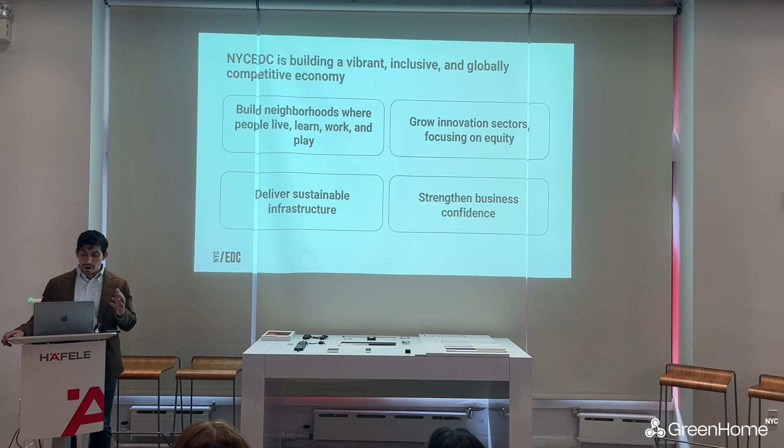We are developing infrastructure, so everything from ports and ferries to big logistics hubs around the city. We develop and run those, and then we have a data analysis arm that's really about strengthening business confidence and reporting on trends in New York City's economy.

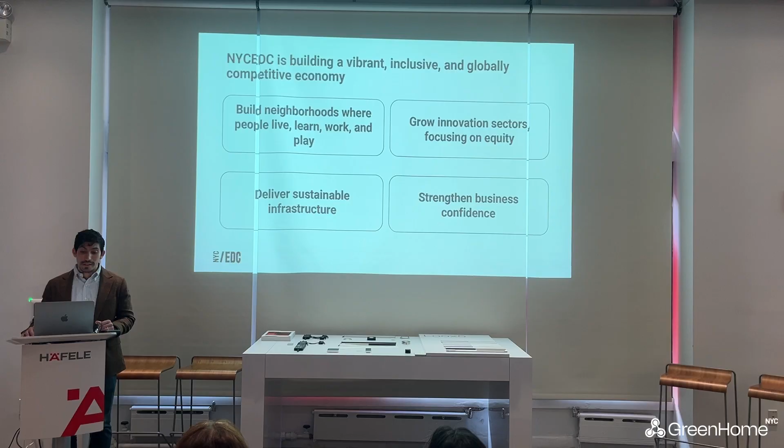Even if you have heard of EDC, or if you know EDC, I think it's hard to wrap your head around how big its reach is. There are over 200 properties around the city that are managed by EDC. It adds up to about 64 million square feet of real estate. We're also building all the time, about 170 capital projects worth about $9 billion that are either under construction or about to be, and then over 400 programs and initiatives that are all about growing jobs and expanding businesses here in New York.

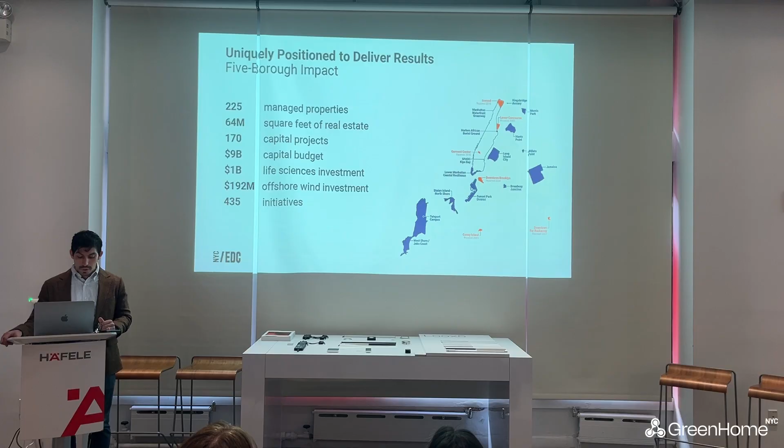And so on the green economy front, early last year, the city EDC put out this report called the Green Economy Action Plan. It has over 60 commitments and investments about growing jobs in the green economy, which is a lot focused on the building sector in New York and on the transportation sector.

There are about 150,000 jobs that are in the green economy today. That's about 3% of jobs in New York City. We expect that to more than double by 2040, and there'll be over 380,000 jobs within the green economy. So all the initiatives that came out of this plan, including an initiative around mass timber, is really what my team works on.

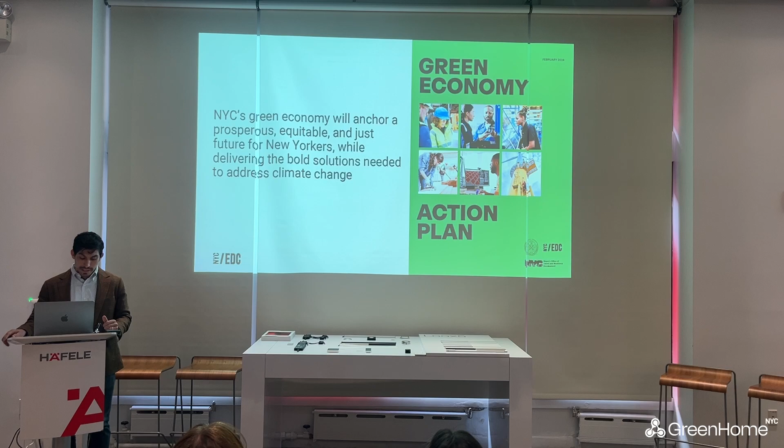People may have heard of EDC in the context of a builder or an asset manager, but really on the programmatic side, where I focus with the green economy, part of what we do is help pilots get off the ground. That could be new climate tech, giving them space to test out and demonstrate their products on our assets. It could be less new tech, like mass timber, which has been around for a while, but really giving space to try out the product in a real environment.

We are also supporting regulatory wayfinding, and by that I mean New York has lots of regulations at the local level. Most of them are about safety, and we will help climate tech companies or climate tech projects navigate the fire department, the buildings department, and make sure that their projects can come to fruition.

And then lastly, like I said, we have a big real estate portfolio, so we are using our procurement power, our capital construction projects, to scale some of the climate technologies that we're most excited about.

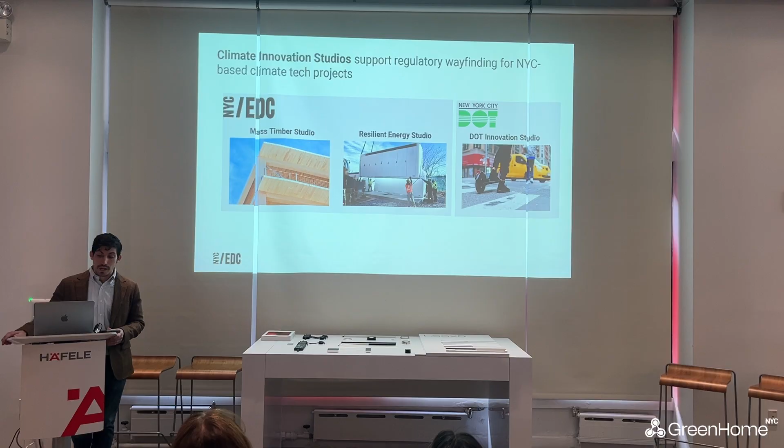So on to how this relates to mass timber. We run a program, or a couple of programs, under the umbrella of the Climate Innovation Studios. Two of them are run directly by EDC and are programs that I manage: the Mass Timber Studio and the Resilient Energy Studio, which is really focused on battery energy storage. And then DOT runs a studio as well, really looking for these new climate tech projects.

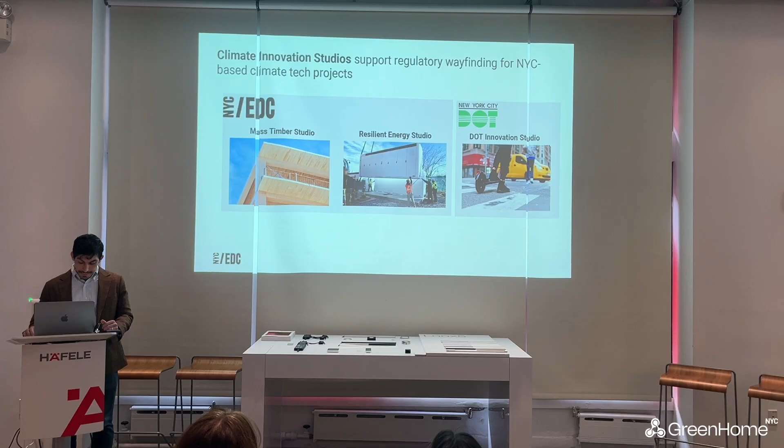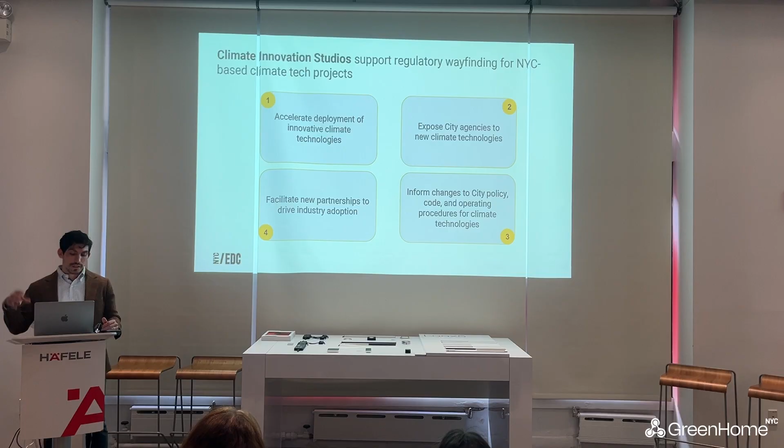The goals of the studios are to really accelerate the deployment of new climate tech, to expose the agencies, mostly the regulatory agencies, to these newer technologies. Broader than that, we're trying to really inform changes to the regulatory environment, making it easier for projects that are deploying climate tech to actually come to fruition in New York, and then try to, as much as we can, facilitate partnerships that are necessary across industry, not just with these projects and the government regulators.

So the Mass Timber Studio really has 4 pieces to it. One will actually identify projects, real mass timber construction projects in New York City, and help them, or pick ones that we think are kind of catalytic. We think that the completion of this project will help mass timber scale up in New York City.

And I guess I should take a step back, but I guess the other speakers will speak more about it. Mass timber is really beneficial because it has a lower embodied carbon than traditional building materials like concrete and steel.

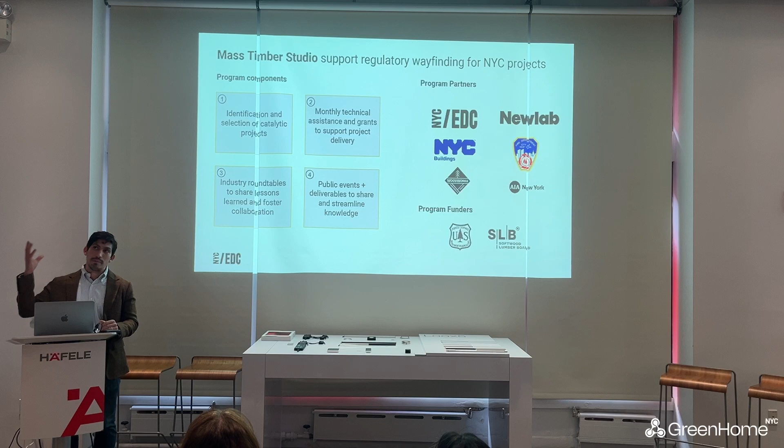Embodied carbon, the way I think about it is: if operational carbon is what it takes to run the building, your HVAC, your lighting, embodied carbon is the carbon that's actually embedded in the building material itself and comes from the construction or the deconstruction of the project.

So mass timber is more sustainable to use, and for architects and contractors who know how to use it, they can actually build their project faster and, if not cheaper, at the same cost as concrete and steel.

So we select projects that we're going to put into the studio. We'll have monthly technical assistance with the projects, and our partner Woodworks, which is a mass timber expert, provides technical assistance to the teams. In addition, we bring in the fire department and the buildings department to meet with these teams monthly, answering questions they have about the building code and helping them as they design their projects.

We have two industry roundtables as part of the studio where we bring together everyone in person, raise the main issues that are impeding mass timber from being deployed in New York, and hopefully collaboratively come up with solutions between government and the project teams. At the end, we'll share lessons learned from this studio, through events and through a report, to make sure it's not just these projects that advance, but the broader industry.

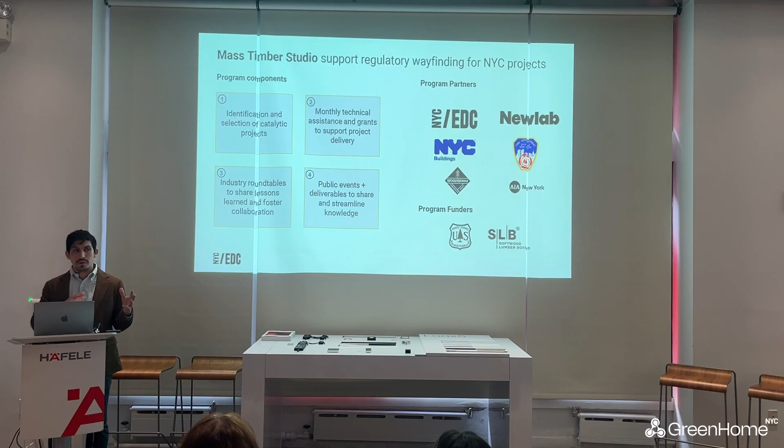Then the second cohort, which we just launched earlier this year, has another seven new projects all around the city, almost hitting every borough. Again, it's a mix of public and private projects—there's residential, some more community buildings, institutional buildings.

Some of these projects you may have heard about. The New York Climate Exchange is the big campus on Governor's Island; they're planning to build one of their buildings with a mass timber structure. A lot of them are located in environmental justice communities, so this is not just a product for high end—we think this could scale across New York City.

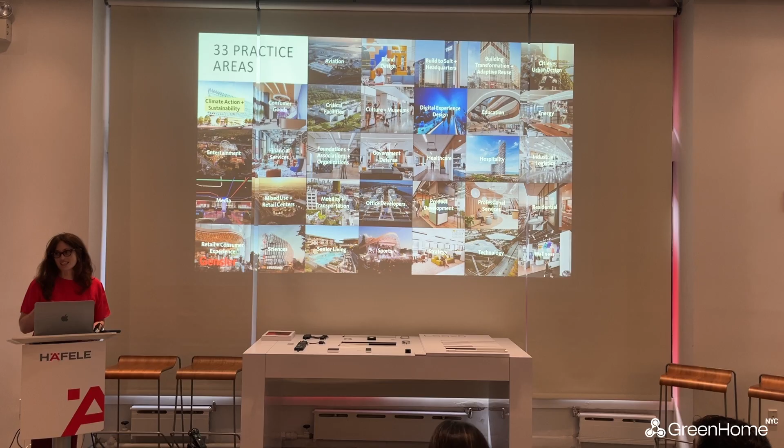So Gensler is massive, and I'm going to jump back to where I was going to start. But I am one of the founding members of our climate action and sustainability studio, which sits within the climate action and sustainability practice area, one of the 33 specialized practice areas that exist within Gensler. As a dedicated sustainability studio, this is very much our mission.

The goal is to turn the goals and commitments of our clients into tangible actions that result in impacts such as the reduction of carbon emissions, improvements in human health and ecosystems, and more circular building practices.

Our studio's work is categorized into 3 main project types. We do your typical certification project, like LEED certification, WELL certification, things of that nature. We also do what we consider strategy projects, things like design guidelines, design standards, sort of regulations for clients of how their spaces are meant to be designed and built. And then we also do a lot of analytics work, which I'll talk about further on in this deck, but those are things like life cycle assessment, daylight analysis, glare analysis, energy modeling.

To give you a little background on myself, I came out of design. Both my undergrad and graduate degrees were focused on interior design, but during and after graduate school, I worked as a researcher at the Parsons Healthy Materials Lab, which is a research and design lab that focuses on educating the industry and the public about potential hazards present in common building materials. They work primarily on low-income housing as their project typology, because this is where you see the highest instances of the worst quality materials, because they are the cheapest.

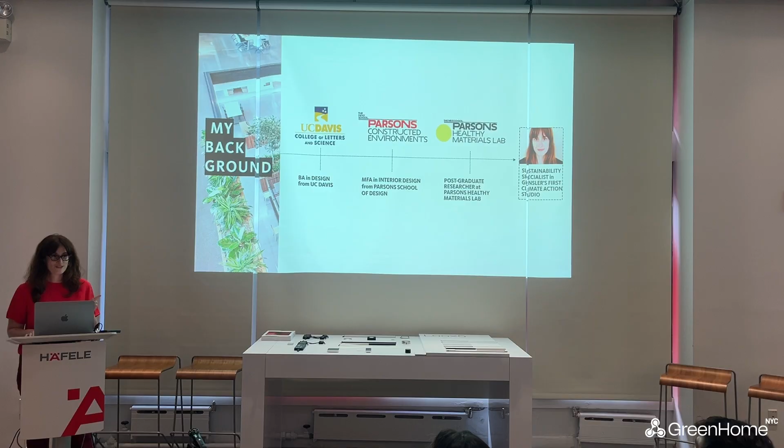I helped develop some of their material collections as well as their first low embodied carbon collection. That work is largely how I came to be at Gensler, and how I came to be involved in the formation of the Climate Action Studio.

Gensler is actively working to shift the built environment towards net zero carbon emissions, both operational and embodied. One of the ways we approach this is through the materials we specify on our projects. Similar to the EDC, we recognize that making better material selections was critical, albeit complex, and that to achieve this goal, we're really uniquely positioned to have impact because of our size.

As I already showed, we have 57 offices. There's 6,000 people working at Gensler across the globe, and 1 billion square feet per year. So by that logic, Gensler is not just the largest architecture firm, we're also probably the largest specifier of building materials on the design and architecture side. This means we have a remarkable ability to influence the production of and demand for sustainable materials.

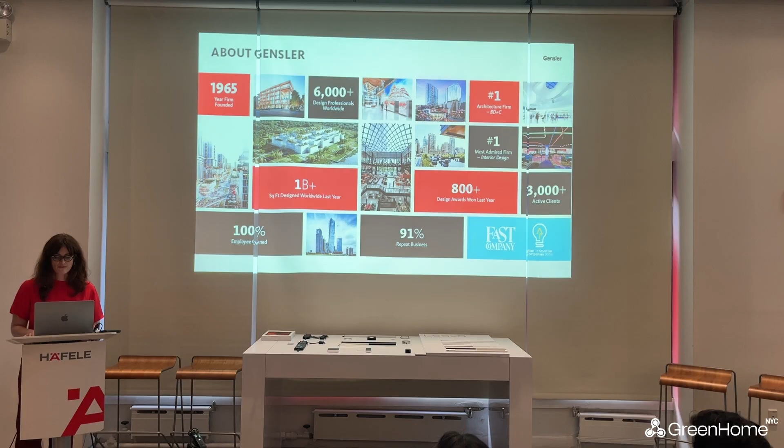I'm going to walk you through a few of the ways we're doing this. The goal is really to drive down emissions associated with the built environment via these sustainable materials and to have an impact. To break down our approach into 3 parts:

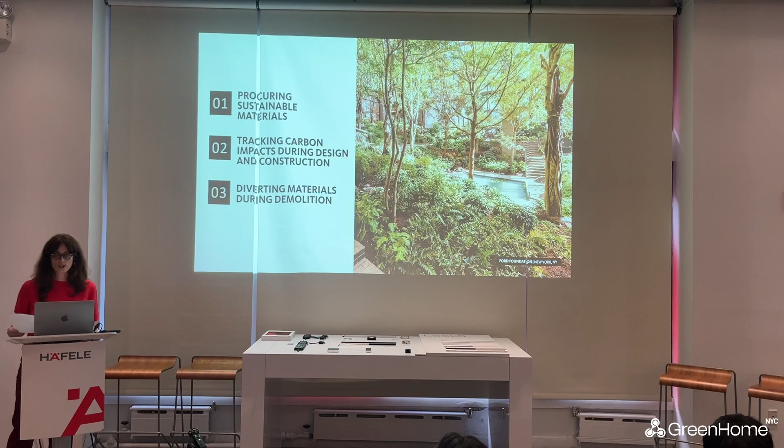The first section, I'll talk about how you get 6,000 people to change how they specify materials and what they specify. Then I will walk you through how we track carbon emissions throughout the design phase and construction, so that we ensure the decisions we put in place are actually happening and those reductions are occurring. And then what we're doing to divert materials from landfill during demolition.

Starting with how do you get a firm of our size to transition to specifying more sustainable materials? The really simple answer is you create a standard for your projects. A standard is just, this is how you do it. And that's exactly what we did.

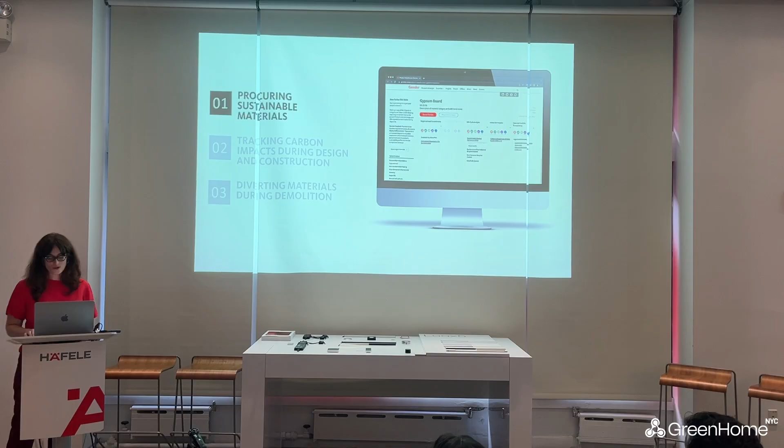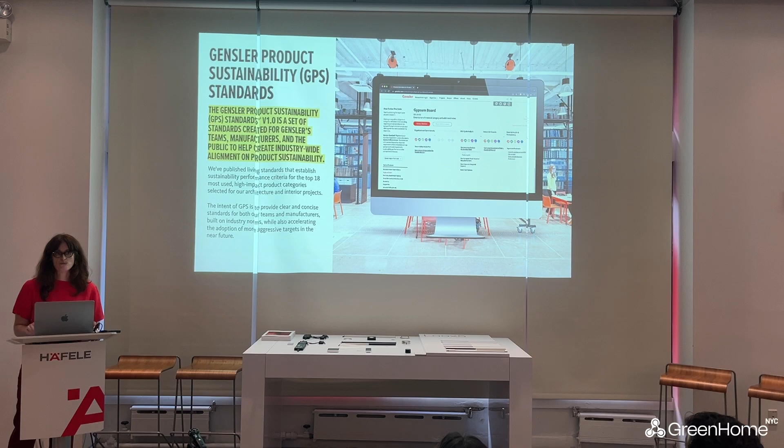The Gensler Product Sustainability Standards, which we typically refer to by its acronym GPS, are a set of product-specific standards that establish both required and market-leading sustainability attributes. Currently, we have requirements for 18 of the highest impact and highest volume products that we specify on our projects. There are also 5 impact areas where the criteria are organized, and 2 levels of performance: a Gensler standard level and a market differentiator level. This standard is being applied to all of our projects across the US, Canada, Europe, and the UK.

So I know that we tend to use a lot of internal jargon that maybe doesn't really translate to something that makes sense. So I feel like this is always just a really helpful breakdown of understanding what it is that we're actually talking about.

So what it is, what it isn't. It's a comprehensive set of sustainability criteria ranging from carbon to human health impacts. So this is not just a set of embodied carbon targets.

We're focused on materials that we, Gensler, specify. We are not focusing on structural materials, so I'm not going to touch on mass timber, but that's largely because we're not structural engineers. So we tend to not be the people on a project who are determining the concrete, the structural steel, not even the facade. Really, we're touching different materials than that.

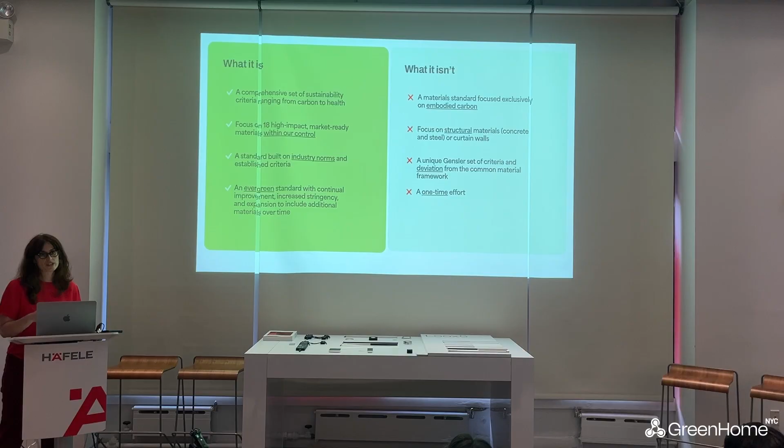So this is a standard that is built on industry norms. This is not a unique set of requirements that Gensler is applying to our projects. This is really built off of the established precedent of programs like LEED or WELL, the work that the USGBC and ILFI have been doing to really drive sustainable material procurement in this space.

And then finally, this is an evergreen standard. So the object of the exercise is not to set a one-time standard and then just hold all of our projects to that. We are going to implement this standard on our projects, and as the market changes, we will shift the criteria to reflect what is actually market leading in a year or two from now.

So, okay, I thought it might be helpful to look at it quickly, but so this is a Gensler standard set of requirements for a specific product. You've got the name of the product, you've got its specification division, and then you've also got very clearly laid out what types of materials it doesn't apply to.

So that really helps expedite the process of like, does this product need to meet sustainability requirements, yes or no? And then when you're at the standard level, the expectation is that a product meets all of these requirements, not just one in each category or one of them.

It's a very comprehensive look at a material. It's expected to have a sustainability action plan at an organizational level. It is expected to have embodied carbon reporting. It's expected to be tested for VOC emissions, which are the way we measure impacts to indoor air, and then expected to have an ingredient disclosure, which tells you the chemical components that are present in a material. It's a way for you to determine if there's anything potentially hazardous in there.

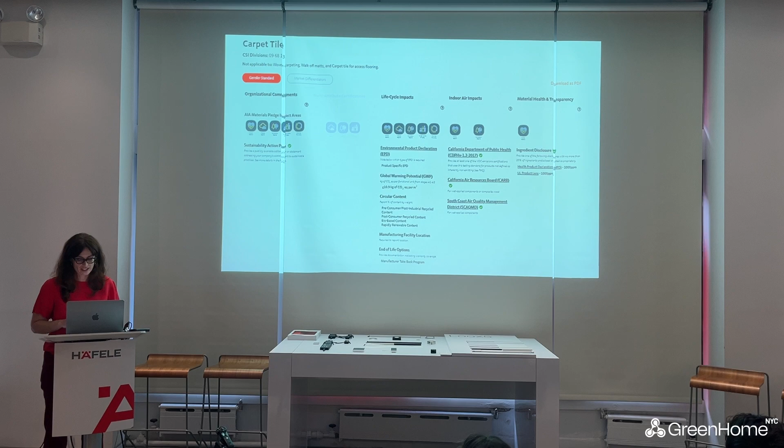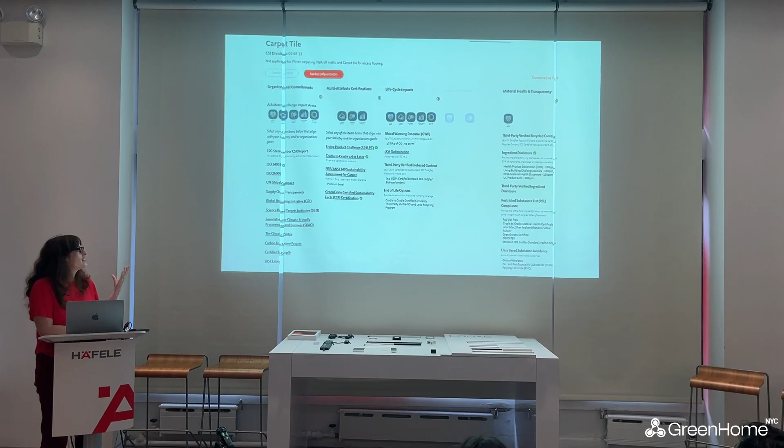And then at the second tier, we've got a whole bunch more options, but the good news is these are optional. They're not a requirement, but this was really an opportunity for us to signal to the market, to manufacturers, to our clients, to our designers, that these are the sorts of things that we see from products that are really leading in a given category.

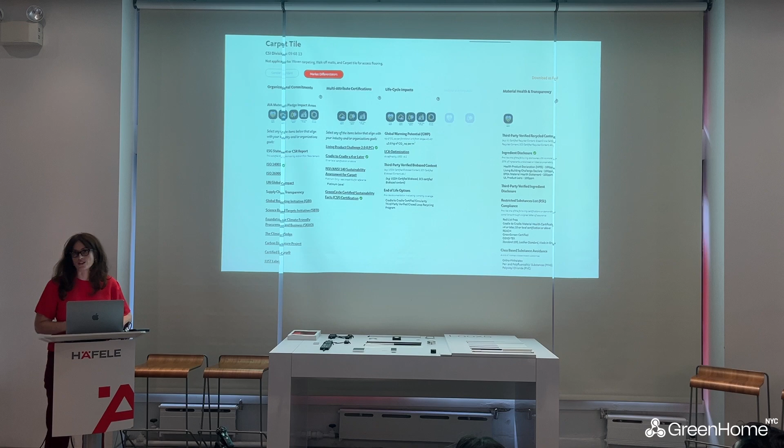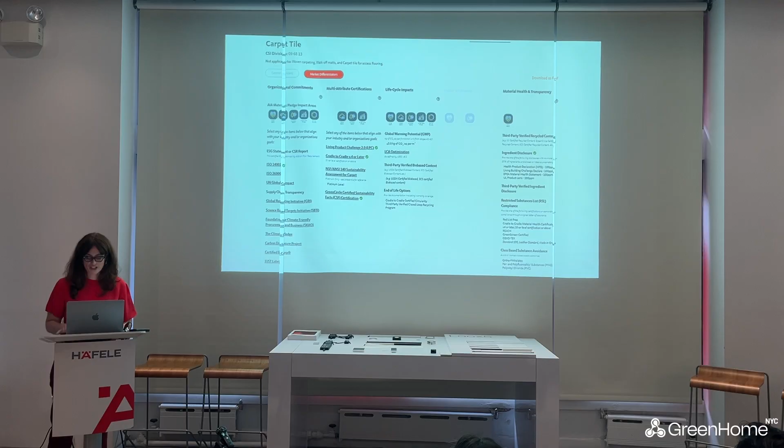So you'll see things like a much lower global warming potential, which is related to embodied carbon. That's how you measure the embodied carbon of a product. You see things like the avoidance of class-based substances. You see third-party verification of things like recycled content and bio-based content. Yeah, it's more stringent and more ambitious.

So these standards went into effect on all of our projects across those four regions, as I mentioned, at the beginning of 2024, and then at the beginning of this year, we established criteria for six new product categories. And these are all now written into Gensler's specifications. So these are required on projects across these regions.

And in addition to researching and refining and publishing this huge undertaking to determine what all of this criteria should be, there's a super talented team of people that have been working really hard to train and develop resources for not just our teams, but for manufacturers and contractors as well.

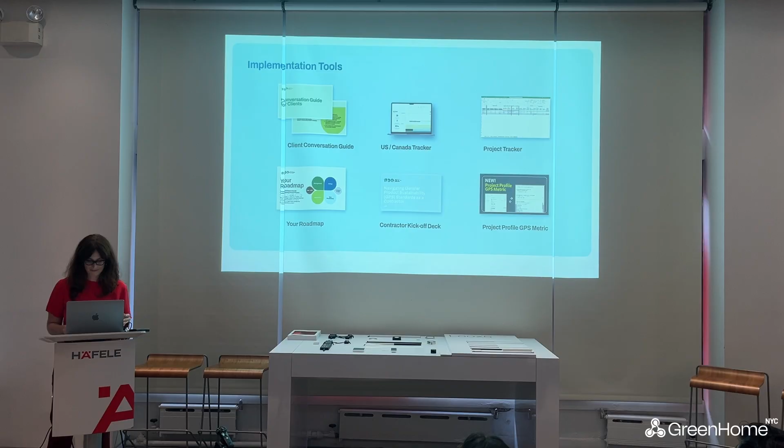Okay, so I think this is pretty huge. One of the largest architecture firms on the planet is now saying that most of the materials that we specify need to hit very specific sustainability targets, but it gets bigger than that.

This is like my "but wait, there's more" moment. This effort to drive the specification of more sustainable materials is really part of an industry-wide effort that's being driven by the AIA, the American—I'm going to get that acronym wrong, so I'm not going to say it.

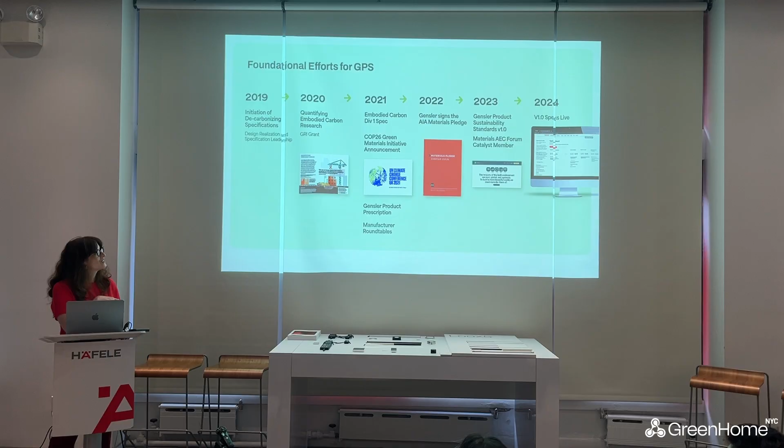As you can see in this timeline, in 2022 the AIA released the Materials Pledge, which was really clear guidance on what you should be looking for in terms of sustainable attributes of a material. Then in 2023, an organization called Mindful Materials began developing what they call the Common Materials Framework. The idea is to align the industry on how we characterize, communicate, and identify better materials in a shared language to expedite the adoption and specification of these products.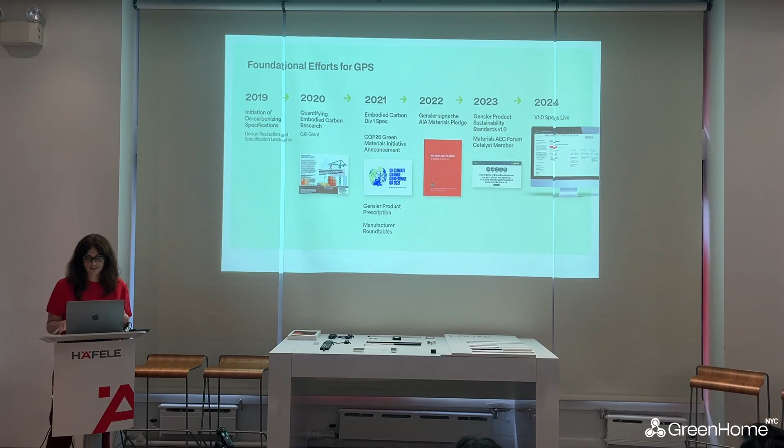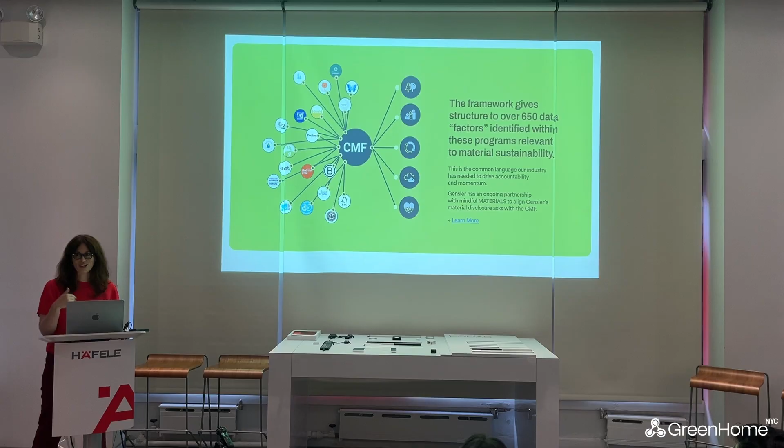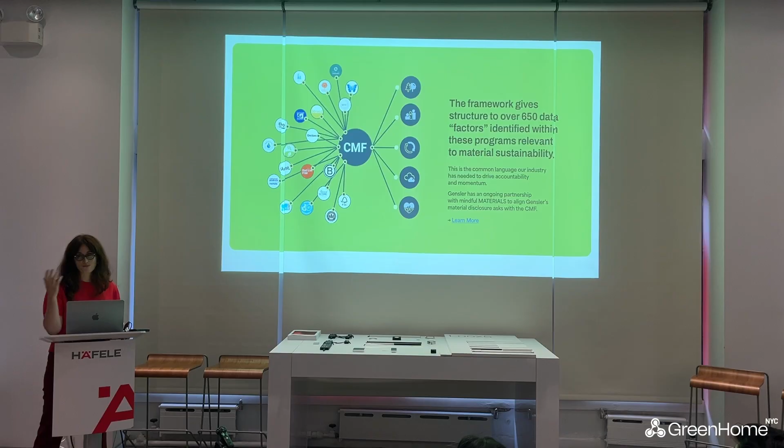That shared language is the Common Materials Framework. What it does is take the literally hundreds of certifications, testing standards, and declarations that get referred to in acronyms, which gets really confusing trying to keep straight. But these are the things that tell us if a product is sustainable. It organizes all of that information into a framework and structure that helps us efficiently communicate across all the parties involved in the manufacturing, procurement, and installation of these materials.

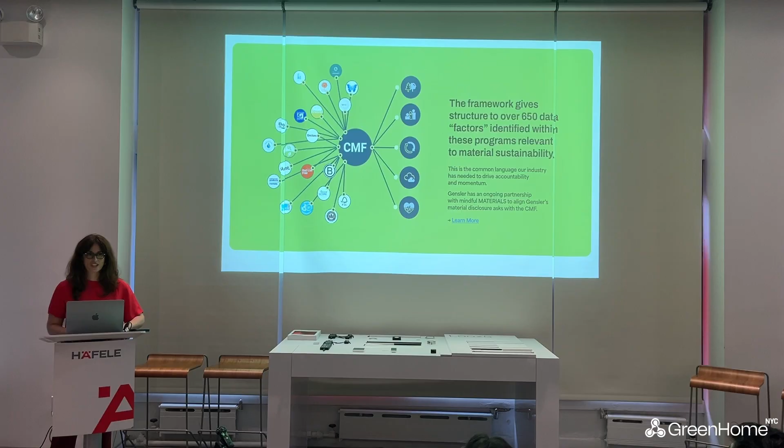In other words, our standard fits into this framework alongside other architecture firms, construction firms, consultants, this massive industry, and we're using this alignment and our size and scale to really drive demand for more sustainable materials. This is resulting in a really remarkable market transformation all up and down the value chain.

Okay, so that was just part one, but that was the longest part. Thank you for going short, Jesse, because I knew I was going to run over. But I'll take you through how we're ensuring that we're driving down emissions during design and construction.

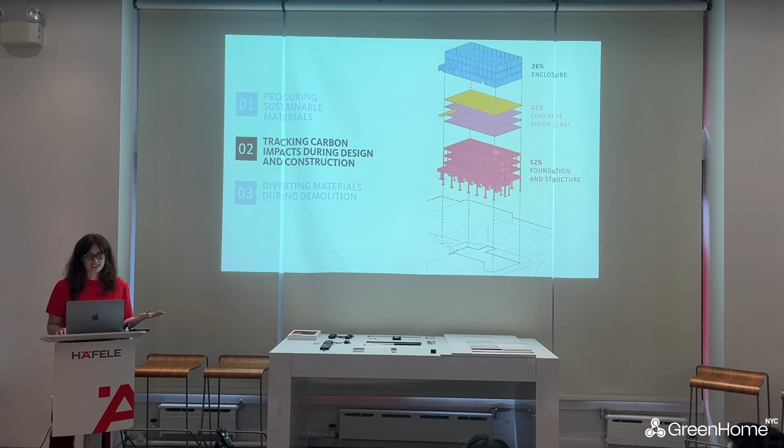So better materials are a great place to start, but not every project is the same, obviously, and the material quantities will vary across your project. So the way that we track this is through what is called life cycle assessment.

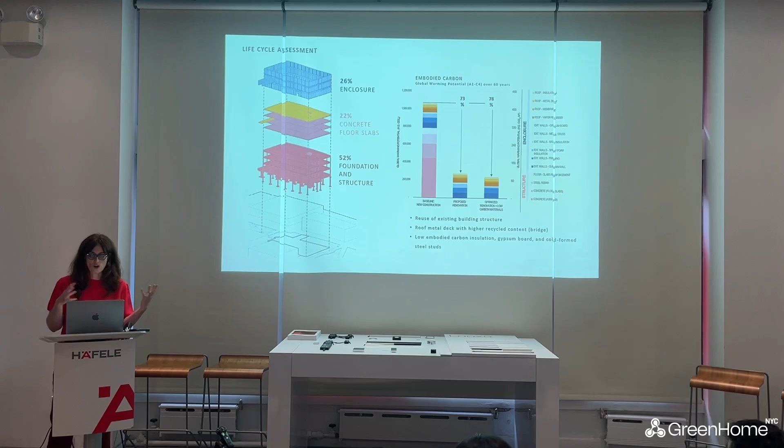For anybody not familiar with that term, these are essentially massive calculations of all the carbon emissions associated with the project. There are a couple of different types of LCAs that measure different parts of a project's life cycle, but for the most part you're going to have a project that tracks A1 through C4, and then sometimes operational energy and operational water are included or excluded depending on how you're doing this.

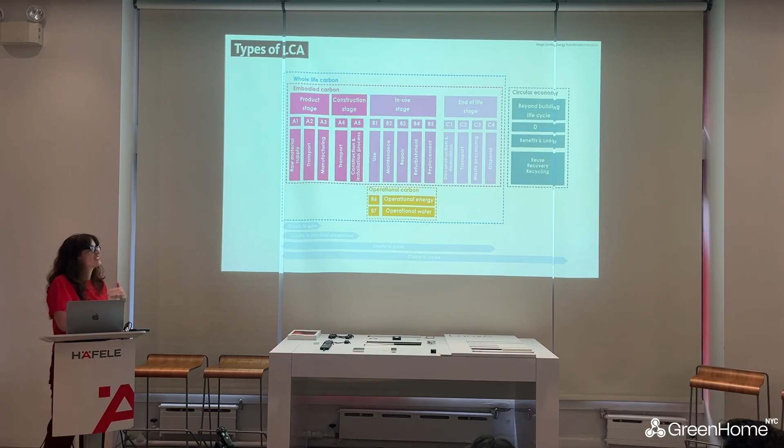So to spend a minute here, if you look at A1 through A3, the product stage, this is the energy emitted to make the product you're using. The construction stage is the emissions associated with transporting materials to your job site, then constructing it. Then when the building is in use, there's repairing items, replacing them, and eventually its end of life. So it is the full life cycle of a project.

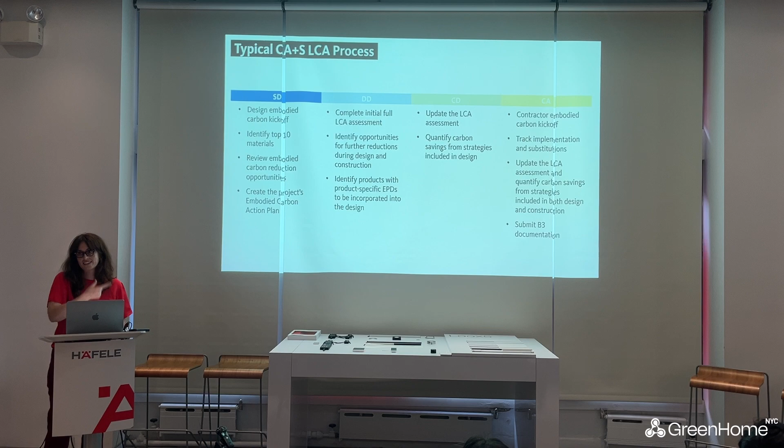For us, this process follows the typical design pipeline, and it tracks a project's carbon impacts at these key phases. We definitely have milestones that we hit throughout schematic, design development, construction documents, and construction administration.

From there, we use these quantities from the project model to establish three key numbers. We start with the estimated emissions if a project is designed using typical baseline practice. That's your baseline number, and that's usually what you show your reductions against.

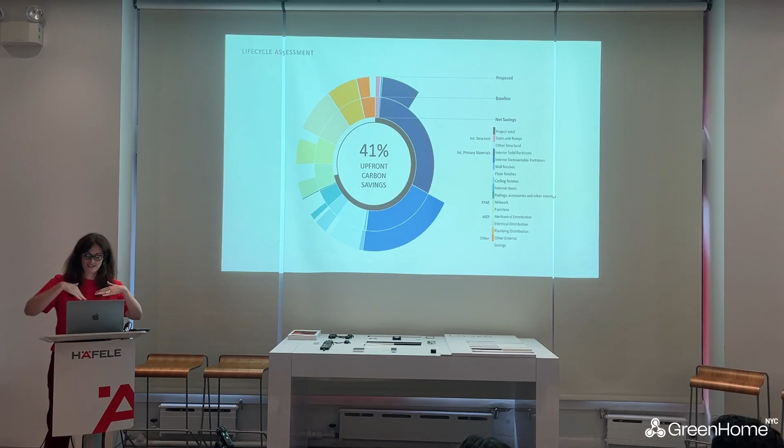Then there is the proposed design, which is that top outer ring. That is the carbon emissions associated with how the building was designed, including all the strategies one can employ to reduce carbon emissions on a project, so better materials, reduced material quantities, things like that. And then finally you typically do an as-built version, which tracks any changes that occurred during construction, which can happen.

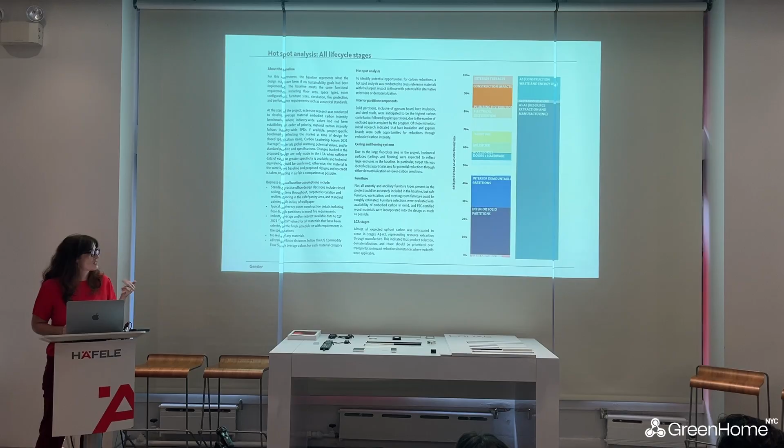This allows us to really see where there are major opportunities and where a project's major impacts are coming from, where we can make the most significant reductions. So if you're looking at this example, 45% of the project's overall impacts came from partitions — from demountable and solid partitions. So if you can make reductions there, if you can specify better materials, you have an opportunity to save the most carbon in that area.

And we are really starting to do this work across more and more of our projects. This is going to be a very significant part of LEED V5, which is the latest version of LEED.

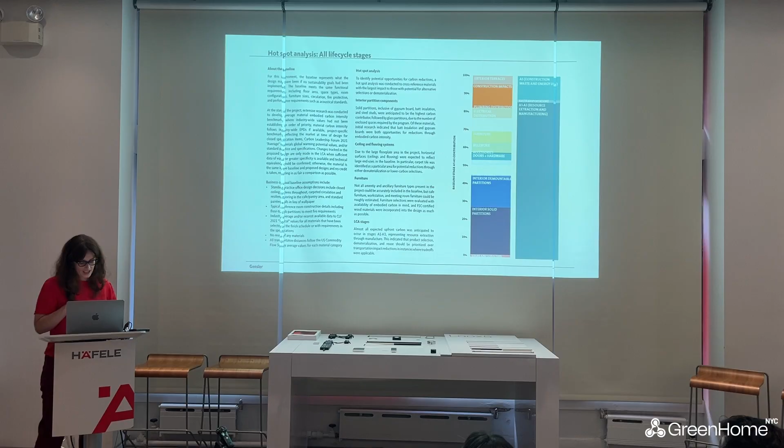Really where we have another tremendous opportunity is with clients who have real estate portfolios. They have tons and tons of buildings that they occupy and own, with design guidelines and standards for how to build their space. When we can work with them to combine specifying better materials with carbon accounting to understand where reductions are needed, we have an opportunity for significant impact, not just across volume, but across a great many projects.

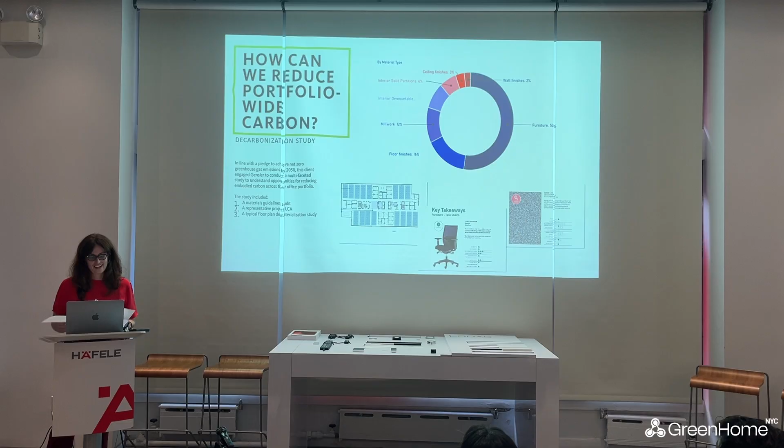I promise I'm getting close to the end. So finally, after all this work to select better materials and track their impacts on a project, a lease term ends and many of these materials just get demoed and wind up in a landfill. Ideally, our practice and culture would shift toward reusing the materials on site, or reusing materials present on site in another location, rather than putting them through recycling or downcycling.

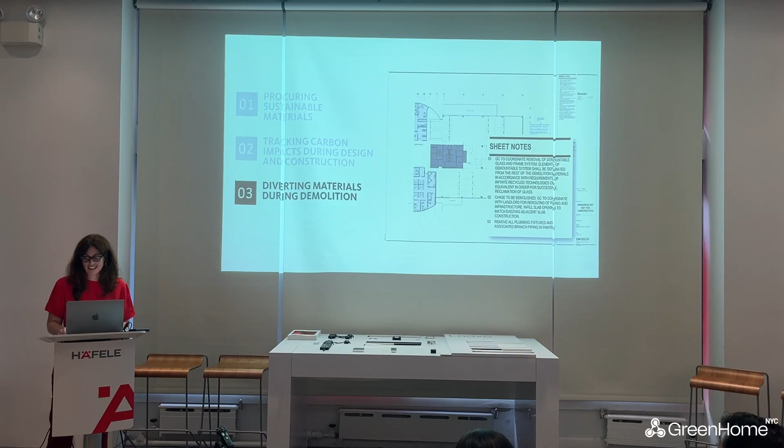But we're really not seeing widespread adoption of this approach. We're seeing a lot of materials go to landfill, and it's even estimated that 60% of the city's solid waste comes from construction and demolition. But this is starting to change.

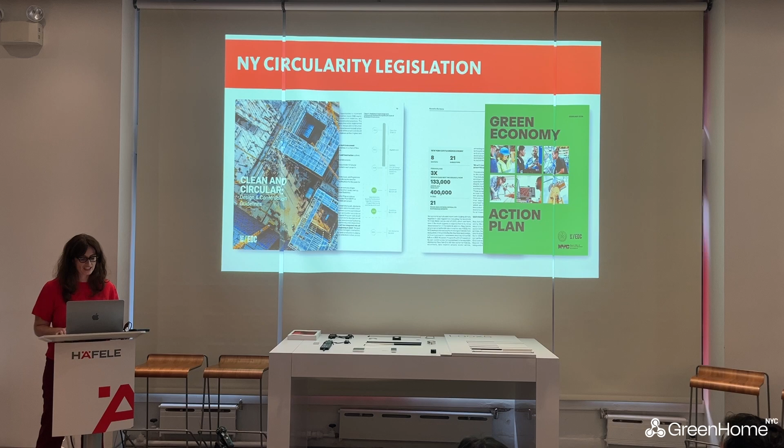We as an industry are starting to understand that although 75% of a project's embodied carbon comes from the material sourcing phase, there is still 9% of emissions coming from deconstruction and demolition. When you're talking about a really big project, 9% can be a massive amount—tons and tons, hundreds of tons of carbon.

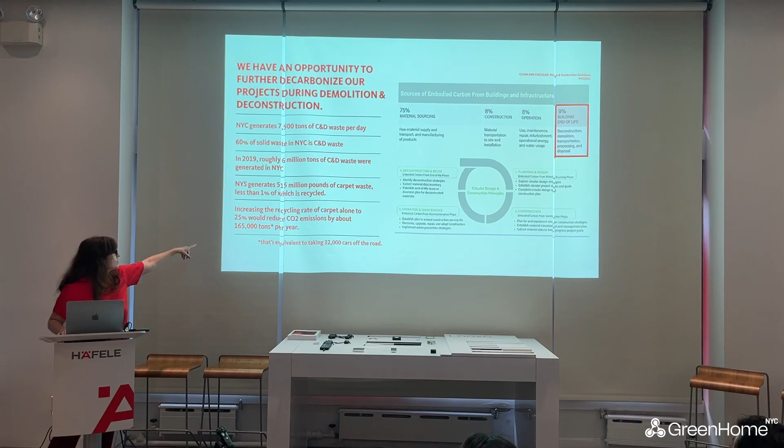We're also seeing that even increasing the recovery and recycling of these materials in smaller amounts can result in significant carbon savings. This stat, maybe a little hard to read, shows that even recycling 25% of carpet, if diverted from landfill, would save 165,000 tons per year.

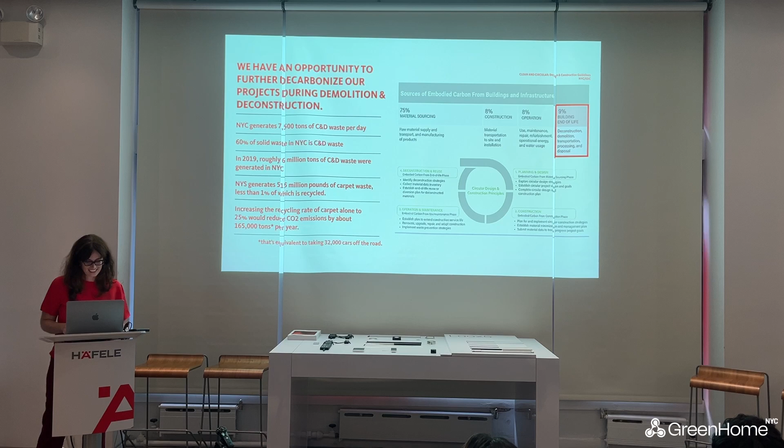So we have made this a priority in our practice going forward, because it directly ties into our mission of designing for impact and reducing emissions from our projects. I'll walk you through our approach, but we're really focused on two materials at present: float glass and carpet tile.

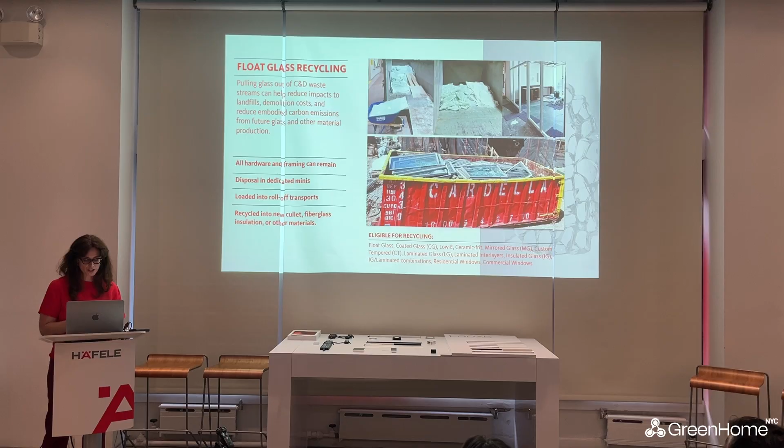Thanks in large part to the Durst Organization—Sydney Mainster from Durst connected me with this organization—there is an industry-wide, city-aligned effort to increase the diversion of demolished architectural glass. This mostly goes to landfill because of the misconception that architectural glass can't be recycled due to glazing, coatings, and other factors. But it can. There are recyclers with the capacity to recycle these materials, and manufacturers who want the raw material.

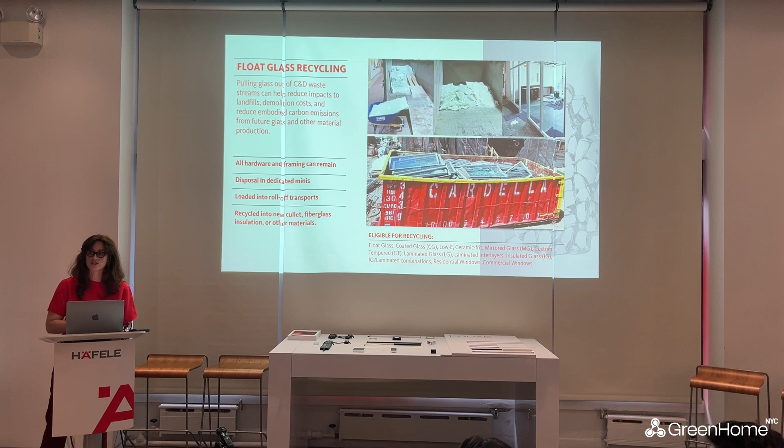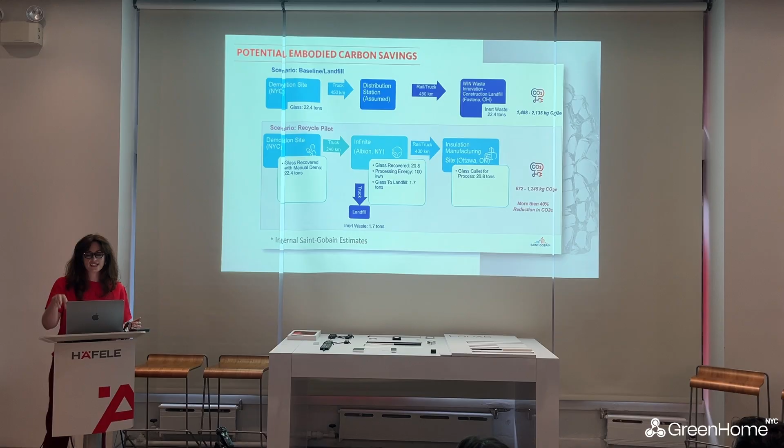One example is Saint-Gobain, who you might also know as CertainTeed. They use recycled glass to produce fiberglass insulation, and by using recycled glass instead of virgin raw material, they're able to cut down the total volume of raw material and reduce the temperature of their furnaces to melt the glass into a thread they can spin into fiber. They're using this to drive down the embodied carbon impacts of the next phase of material they produce.

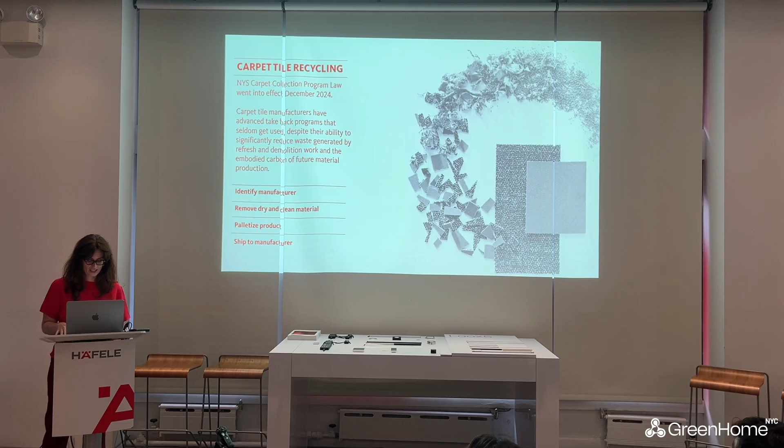We're also looking at how to recover carpet tile from landfills, largely because these materials present a similar opportunity to reduce carbon as architectural glass and insulation, but also because the state has enacted legislation to recover these materials.

So there's now going to be an influx of these materials being diverted from landfill, but it hasn't really been determined where they're going to go and what's going to happen to them. I think we're trying to learn these lessons quickly, to figure out how to get them back to manufacturers to drive down the emissions of new material we specify, and start having this impact now.

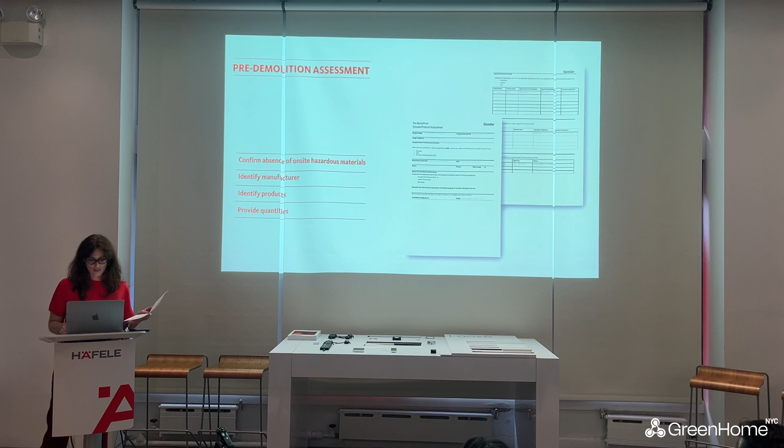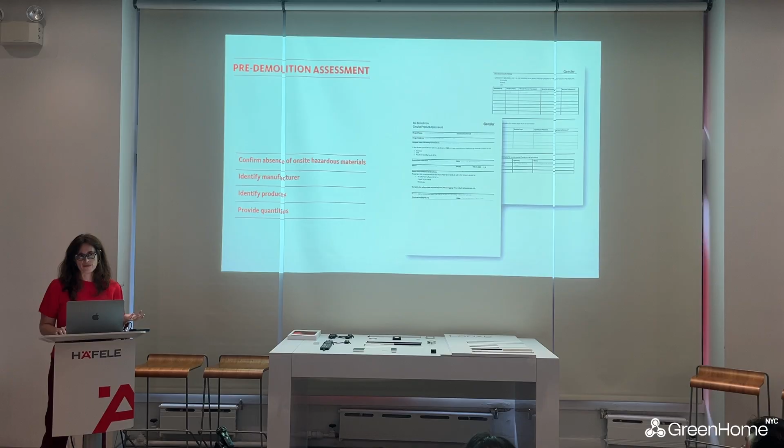The way we're doing this starts with a simple method to identify what materials are slated for demolition on our projects. We're currently piloting a form that would be included in our demo sets. It contains information about the site, materials, their presence in what quantities, and whether there are barriers to recycling, like asbestos or lead, present on the site.

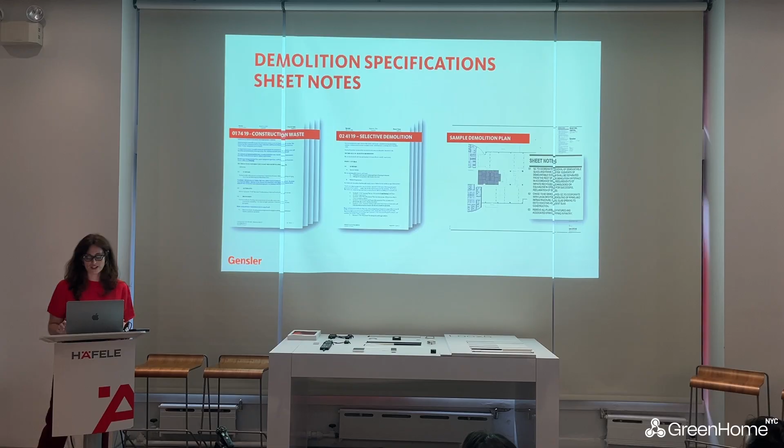We're also piloting draft specification language that provides guidance on what to do with demolished materials that have the potential to return back into the circular supply chain.

This kind of brings me back to the beginning in a way. Ideally we would be seeing these materials reused on site. The goal is to reuse, not necessarily just to divert from landfill and recycle. This would have such a significant impact on the embodied carbon of our projects. As we work toward shifting this practice and our culture, we're not waiting for a single silver bullet solution. We're looking for as many viable opportunities as we can and doing our best to implement them across massive scales.

By taking this approach, we're able to make the best choices today to drive down the impacts of our projects, tracking performance and returning materials as feedstock for new lower embodied carbon products that we then specify on the next project. This allows us to increase the stringency of our standards, which has a ripple effect throughout the industry and the world. This is really what we at Gensler mean when we say we're designing for impact and creating a better world through the power of design.

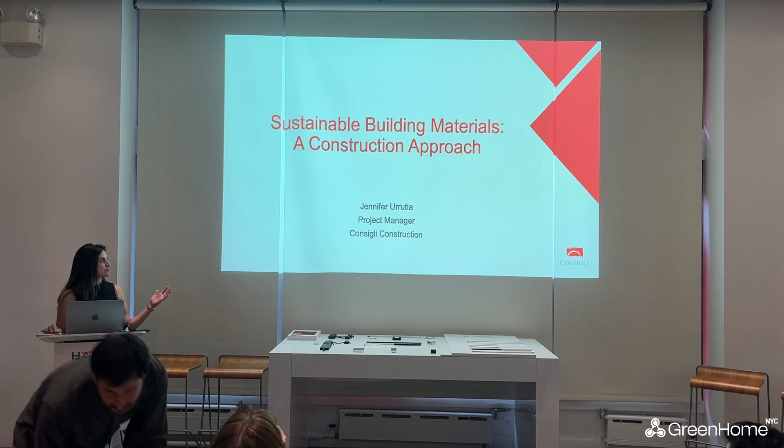Carrie went over the design side. I'm going to go more into the construction front. I'm Jennifer Urrutia, a project manager at Consigli Construction. Prior to being a project manager at Consigli, I dedicated my career to sustainability and transitioned to project management with a goal to help integrate sustainability with what's happening in the field, and where some of these gaps end up happening.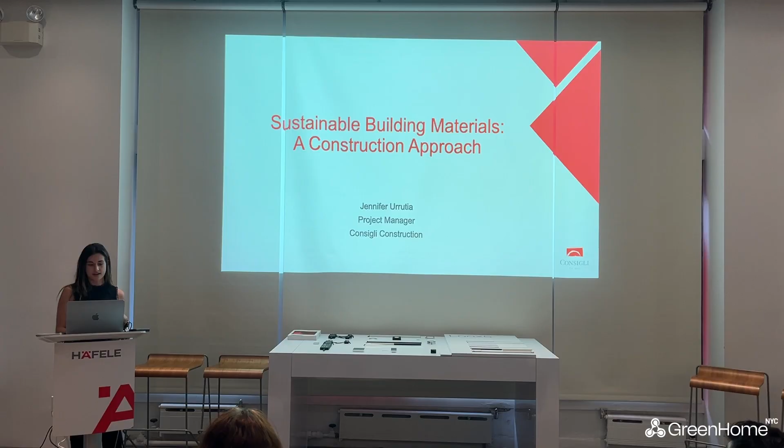So just a little bit about Consigli. It's a 5th generation family-run organization originating in Milford, Massachusetts, and from the acquisition of Lend-Lease grew to several cities. This is Consigli's presence all over the country as well as the Virgin Islands.

One really unique thing about Consigli is there's a self-performance department within the company. We actually have employees who are tradesmen that work for us and can do carpentry, millwork, any type of labor, as well as concrete. This allows us to have more of a direct impact on how some labor is occurring. It's not on every project, but it is a resource we have internally.

We also have an energy modeling company to help reduce the operational energy of buildings, and a lot of involvement with Local Law 97.

So highlighting a few aspects of sustainability with Consigli before we dive deeper into the embodied carbon conversation: these are actions we do on site through most of our projects when possible. We separate all the drywall to make sure it gets recycled, since that's a material that emits pretty toxic emissions in landfill. We also do a lot of deconstruction, as Carrie highlighted, making sure we're reducing altogether what actually gets sent off the job site into landfill, and recycling and diverting when possible.

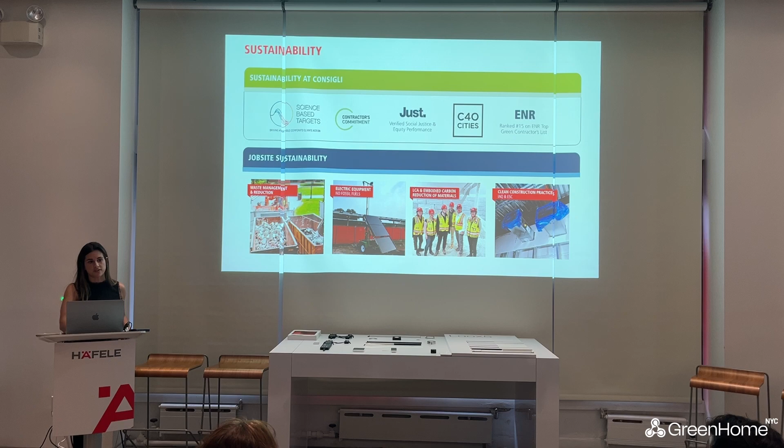So we'll go into embodied carbon. That's also something we really focus on with our own internal language—clean construction practices, a little like what Carrie talked about, making sure we have materials on site that aren't harmful, and also trying to help mitigate the dust. A lot of what LEED requires, but we just do that standardized.

Okay, so also great segue - Carrie talked a lot about the interior materials, where the design team has control over that. So when it comes to us as a general contractor, we don't have the flexibility and ability to really change a lot because it's design based. The aspects that we can control more of are the structural elements.

So concrete really being the most exciting opportunity, because there is so much out there that really has been proven to be reliable from an engineering perspective.

So one aspect that we have been doing on a lot of our projects is using ground glass pozzolan, which is a cement replacement in concrete, helping reduce the emissions - it's a slag and fly ash substitute. That's something you could easily do in sidewalk pours. It tends to have a lighter color as well, which is also great for reflectivity and albedo effect. So the color's a benefit as well as the ease.

Local batch plants have this available if you request it. USA and Gotham are two locally that you could request ground glass pozzolan to go into your concrete mixes. So sidewalks are very common, as well as foundation.

The One Java project in Brooklyn, it's about an 850 square feet building - 750 or 850,000 square feet. The foundation was all including ground glass pozzolan. So it reduced the emissions 40% of the building by having that substitute in the concrete.

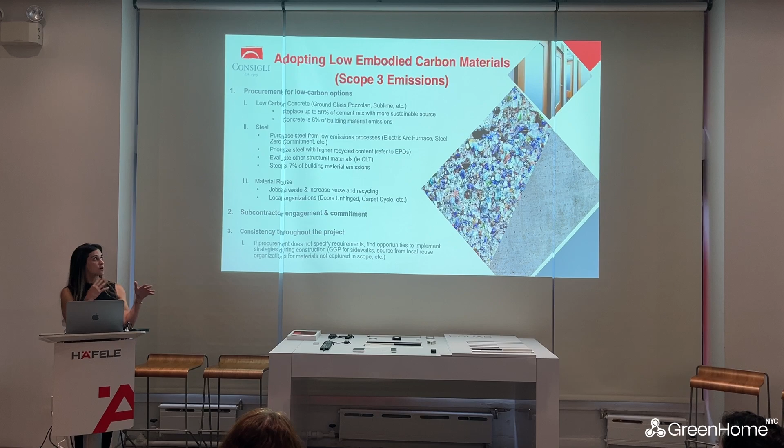Your subcontractor building it is going to be really critical in all of this. So you need to get their buy-in, but you also need to do some education to make sure they're not arguing back, because I think doing something different tends to have a lot of pushback from someone who's never done it before. Luckily, some of the concrete mixes are becoming more common, but there's still a lot of uncertainty, and as a result, some contractors don't want to be involved. It's just kind of a challenge you deal with, but there's a lot of articles - it follows ASTM standards. There's a lot of backing for supporting these adoptions.

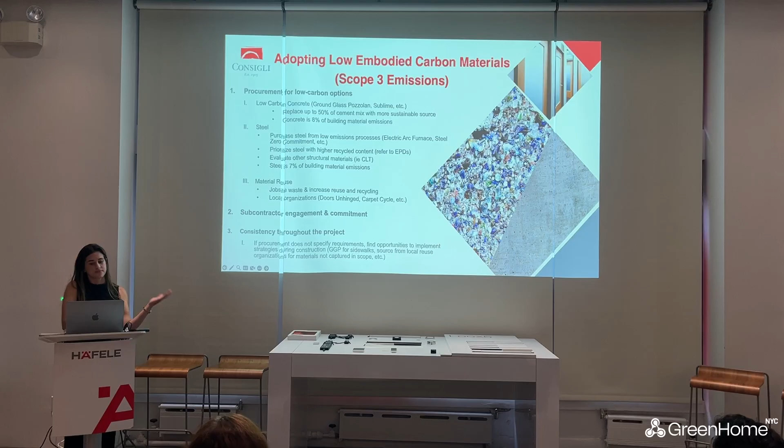And then if it wasn't specified, find opportunities throughout construction to implement it. So we touched on mass timber a bit with Jesse.

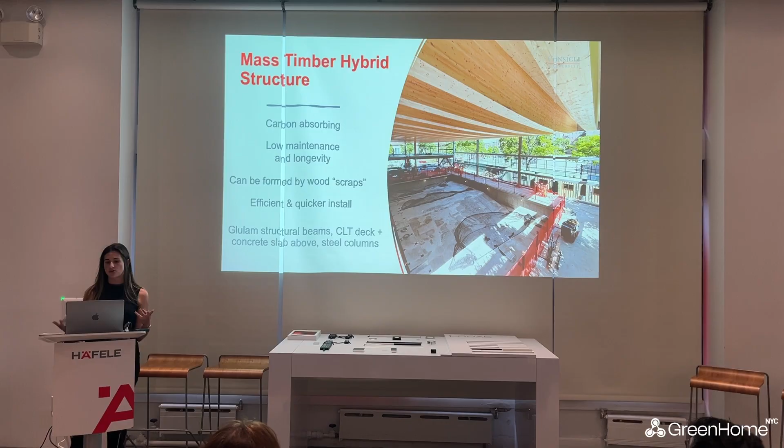He set some of the regulatory framework of where this is going. There's a lot of interest in CLT from a design perspective and use perspective. It has lower embodied carbon, so it really is appealing for a lot of reasons. I think in New York it's not very common yet because we're still figuring out some of the regulatory concerns, whether fire related or structurally related.

Here's an example of it being used on a recent project of mine. Typically if it's wood, it tends to go with the wood subcontractor, but because of this structural element, it was installed by the steel contractor, which logistically made it a lot easier. These 19 beams were installed in 2 days, which is quite fast, but it really shows the ease of handling this and the preciseness of what you're actually getting when you order it.

These are glulam structural beams, and how they're made is not necessarily from scraps, but from pieces of wood that get assembled together. So you're using wood that would otherwise be waste, or go to another product, but you're kind of using a waste product to make the beam.

Another benefit of using CLT is it acts as a carbon sink, so to speak - it's absorbing carbon, which adds to the decarbonization benefit. It's also low maintenance. This particular installation is going to be in a wet environment. If this was steel being painted, it would chip and require a lot more maintenance to maintain. So one other benefit with CLT is that it's a natural product and low maintenance as a result.

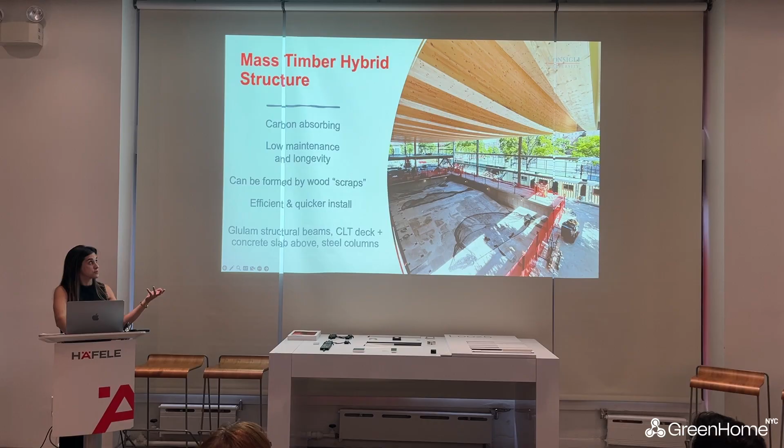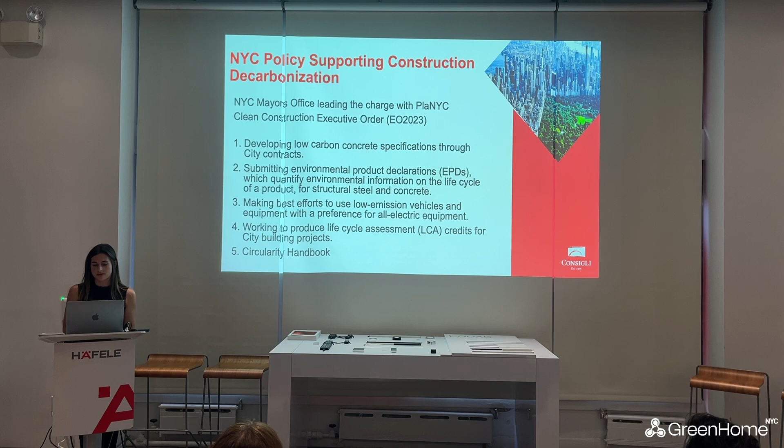Both speakers touched upon some of the policies surrounding decarbonization as well as circularity. There's a lot of attention from the city, as Jesse highlighted, for figuring out ways to really integrate these methods into practice, whether from a policy standpoint or a guidebook. There's a lot of support locally, a lot of interest in this as a whole, and a lot of opportunity that's quite exciting. Thank you.

Does anyone in the audience have any questions?

Question for Carrie regarding the software you guys are building - you have quite an abundant amount of information regarding materials. Is there any plan to sell or share that information? You might have brought it up in your presentation. No, I didn't touch on that. But part of the common materials framework, is that what you're referring to? That's correct, but that's not us - that's a nonprofit, third-party organization working on this, and the next big phase for them is to really make a digitized version of all this information in a way that's publicly accessible. They're doing that through a platform right now called Building Ease.

So it's just branded in such a way - I saw some of the slides - all of those certifications are going through the Common Materials Framework, and we built our standard using their language.

Any other questions? Okay, I have one - you said you guys were doing projects in almost all 5 boroughs. Which borough is missing? Is Governor's Island not represented? Well, I guess Governor's Island technically is Manhattan - it is considered Manhattan, but it's not on the island of Manhattan. So we actually do have all 5 boroughs represented.

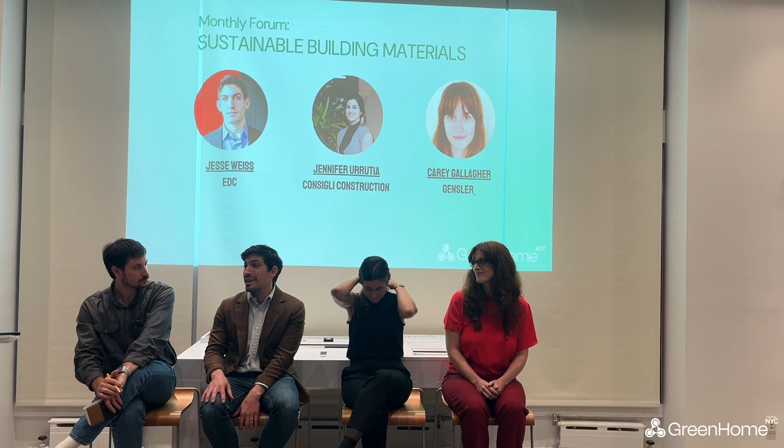Maybe giving the fire department a European tour, showing them that there are lots of countries with smaller fire trucks with longer ladders that can go down narrower streets and reach higher buildings. But yeah, it'll definitely take a lot of time. I should say the people I work with are super interested, super committed to this, trying to learn as much as they can. They always brag to me about how much they're speaking to European experts and learning about mass timber. But the department is huge — they answer to the commissioner and deputy commissioner, and mass timber is not high on the priority list when their job is keeping people safe and responding. Mostly what the fire department is set up to do is respond to fires, so there's less resources toward the regulatory side of things.

This also shows up in battery energy storage — there's fewer technical experts, since most of the department are firefighters.

This is a question for everyone. How do you find your clients navigate cost and benefit? Because sometimes sustainable materials are cheaper and sometimes they're not. How do they balance their sustainability goals and also saving money?

Yeah, it's definitely a topic of conversation that comes up a lot. I can't think of a specific example of a client who's really sitting down and doing the math between we spend this much on a more expensive product, but then we save in the long term. One way to think about it is if an organization is offsetting their carbon emissions, then that's less carbon they have to offset down the road.

But I think a fair amount of them think of this as an investment in the sustainability of their space, the well-being of their employees or whoever it is. We do a lot of workspace, so less so thinking of it as tenants in a housing situation, but more employees - there's an argument that value comes from working with these materials, even if they are in some instances more expensive. But we're starting to see more and more that there's stuff out there that's really sustainable and cost competitive - it's not the same price tag it used to be in a lot of instances.